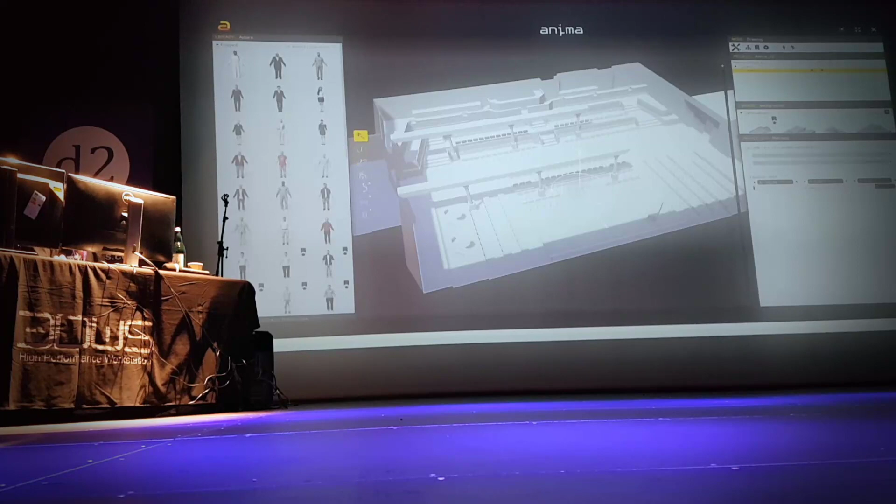Okay, so here we have these. So what you're seeing here is the actual model we will be using. This is a very low polygonal model, which is important since we want to work in real time, we have to take care about this, even because this model is used to calculate collisions, and we are going to do this.

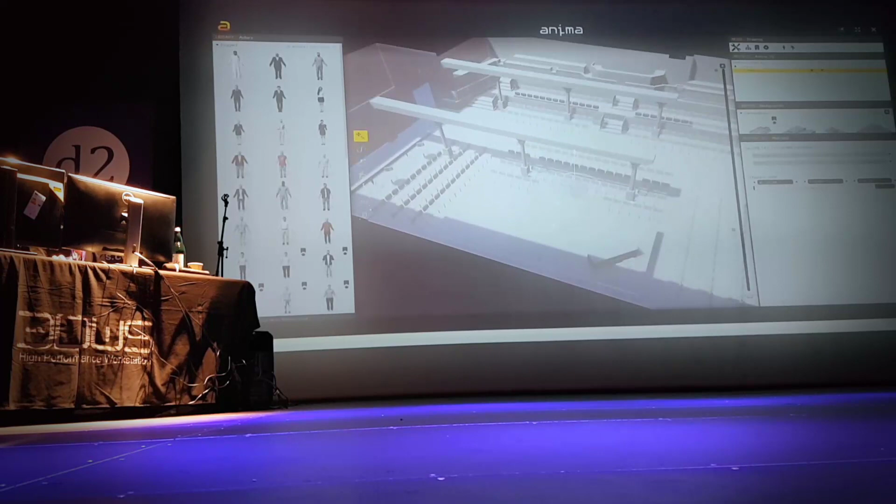What I'm going to do now is just create a section here so I can work a bit better. So here we have the entrance, and I will start by creating a path, simply drawing a line here, like this, and there we have it.

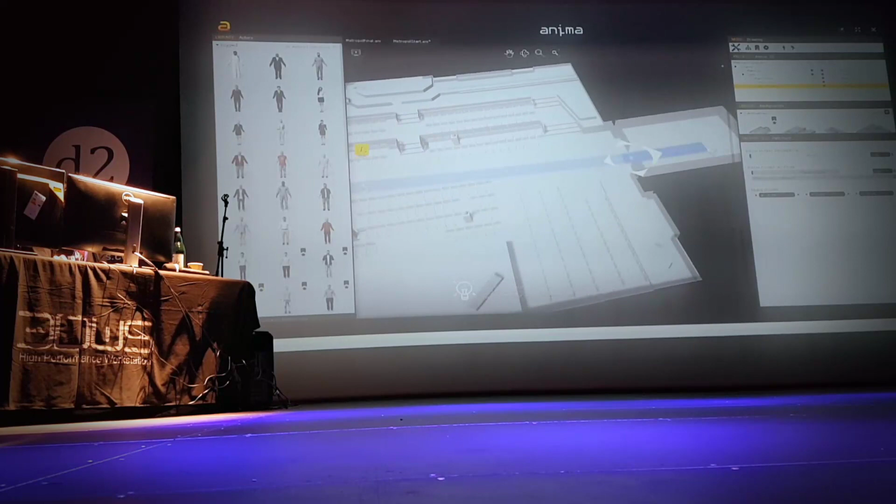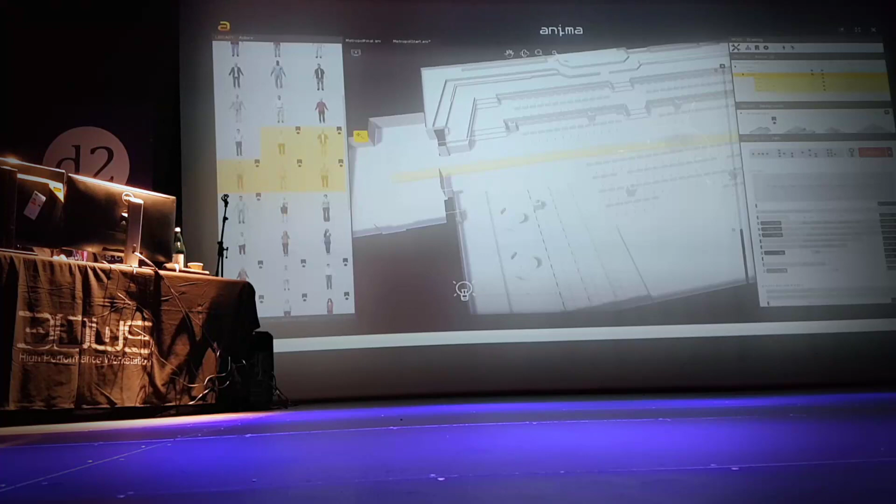So we can now start populating this path with characters. We have a list of characters we can use. We can leave the program to choose the characters by itself, but what I'm going to do is actually choose the characters I want to use, and just drag them here and click generate, and that's it.

Actually, I want them to move the other way, so we change the direction to forward. And now I can also easily change the number of characters I want to use, then click generate again, and that's it.

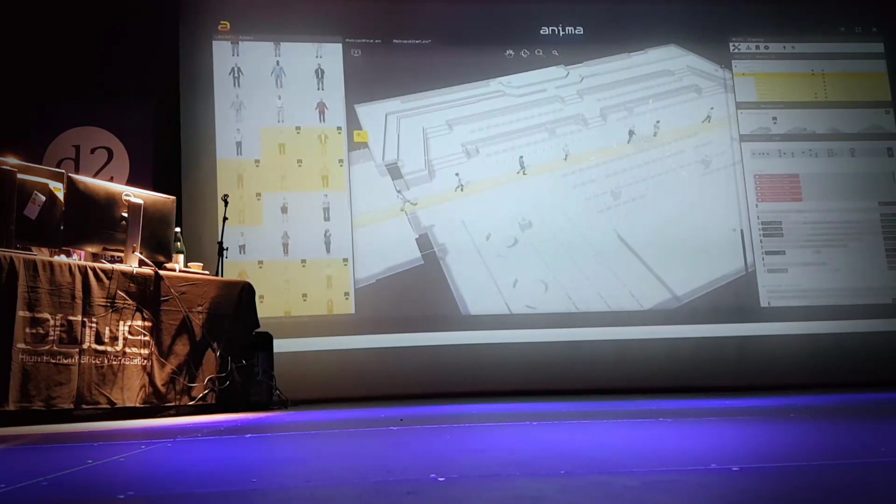Now it's very simple to use this. We can just select a vertex here on the path and move it. What I'm going to do now is make this path a little smaller, because I want a bit more space for another path I will be creating.

I want people going around the bar, for example, as they are now at this moment. So I will just create another path here, very easily. And as you can see, we can draw the path as we want, and then we'll be able to change the path shape very easily.

I will select this path, which is the first one I've been working with, and now I can choose to change individual segments of a path. So we can create a path with different width in this case. Okay, so here it is, it's okay.

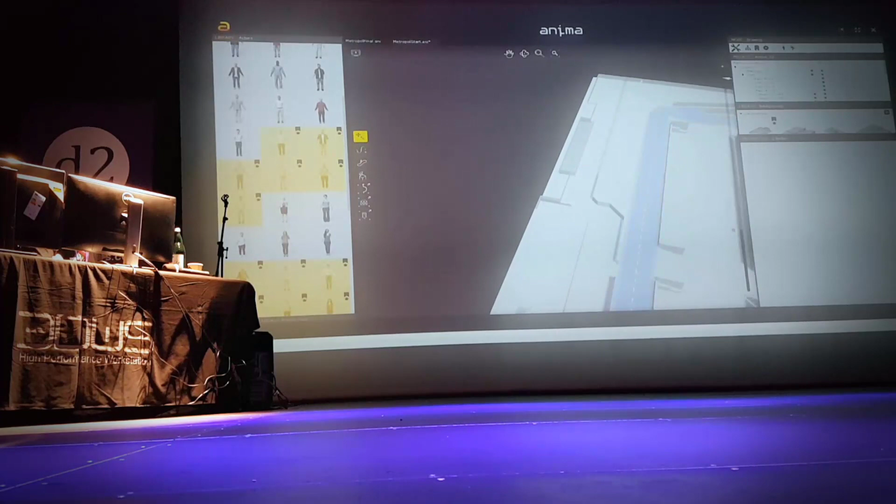I will select this path and apply the same characters I'm using here. This is very simple, I can copy the list and just paste it here, very straightforward and fast. So I will leave 5 characters here, I don't want too many, but I will change the move direction to backward, so we'll have other characters coming back to the entrance there. So click generate, and that's it.

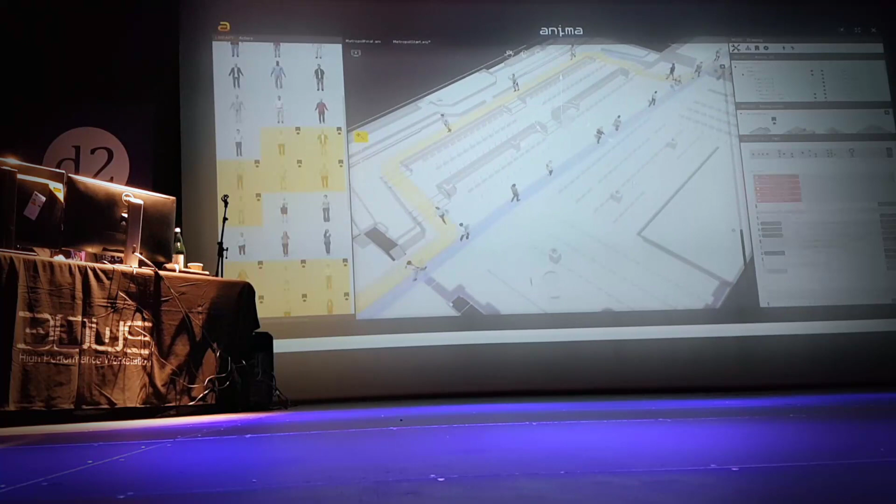And of course, this is in real time, not just because I'm moving it, but because I can just hit play and see, and I can keep moving the scene and see how it looks. So this is very simple to do.

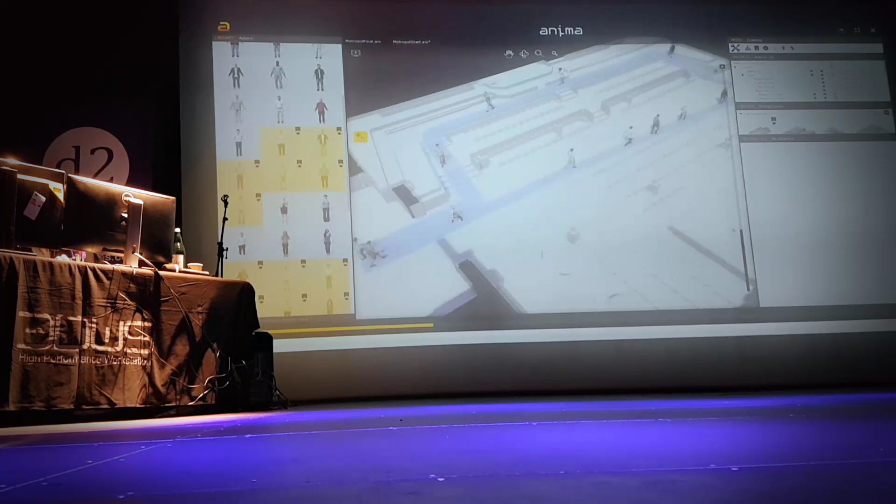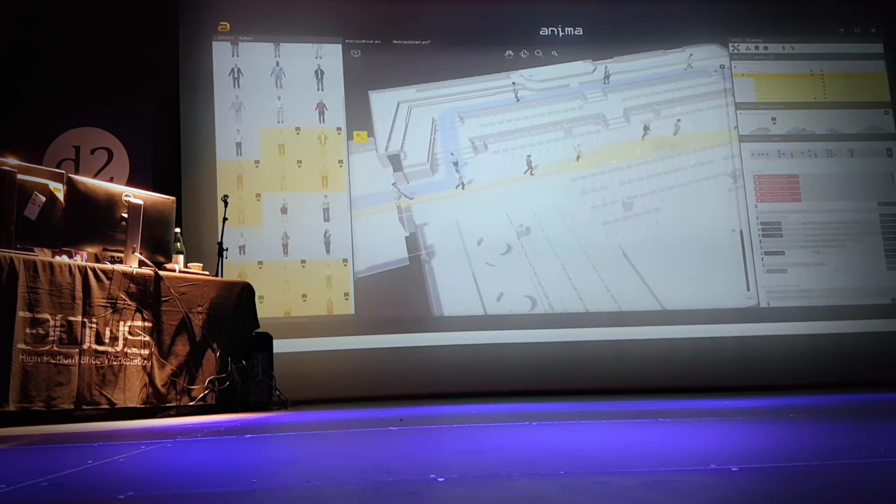We can also select, for example, a vertex. We can add more vertices and change the path, and change the width of this path here. So we can create very different situations.

Now, this is the first step. The second step is that we have a reservation for two. So here we have these tables. Let's just move here. Now there is a table tool, and this is also very simple.

We just click and drag, and we create the seats. We can then move the seats, adjust the position. We don't have to do this right at the beginning, we can do that at the end. So we select this table object. I will select just two, not one.

And click generate. Now, if I do this, I would use random characters, so I don't want this. I want to specify my characters, so we'll delete those, and I will select just a woman and a guy.

It seems we have a seat that's not right, but it's very simple to fix these errors. I just click and drag it to select the edge. Now I can generate, and that's it. And if I have some problem, for example with this seat being too close to the table, I fix it, hit spacebar, and you can see they are already animated.

Now, if we want to create the other table, very simple, just select it and copy it. And of course, I can change the actors. I can, for example, just drag and drop a different actor on top of those in the viewport, and it works. So it's very easy, very fast to do this.

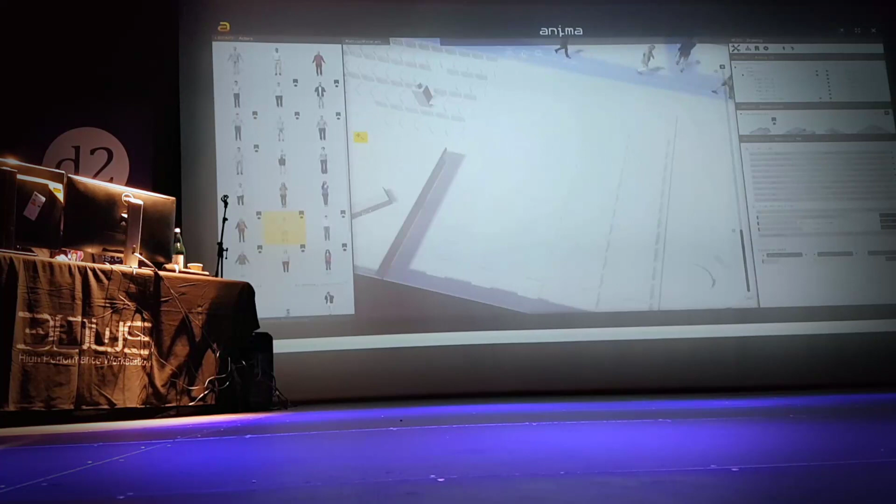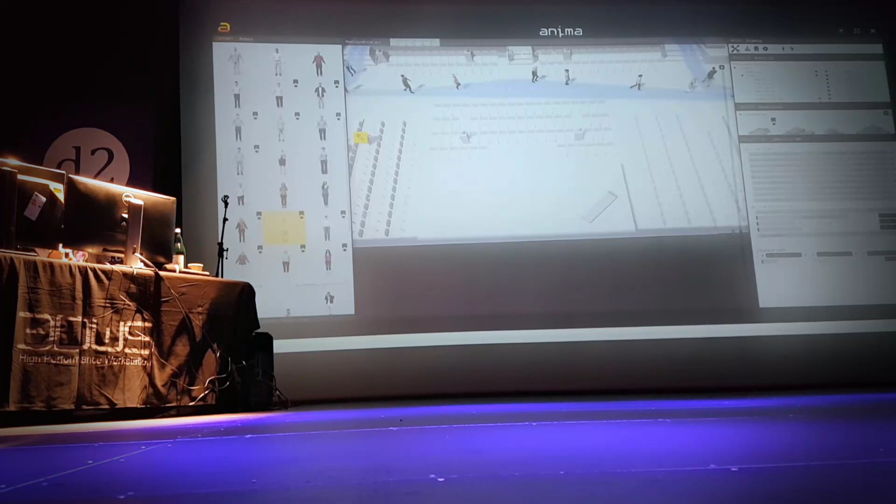Now, before going to the main part, which is the population of this front part I have here in front of the stage, it's a little funny to work with a virtual representation of the same place where I'm giving this talk. That was the idea. Let me introduce you to the area tool.

The area tool does exactly what it says. It creates an area, and we can create this area to make people socialize, simply have people here. We can change the shape of this area by selecting the area and activating the polygon tool, so we can shape this area as we want. As you can see, there is a grid.

That grid is used to generate and place the actors. So what I'm going to do is paste the same list of actors we used before. I will place here, let's see, 5 people. It could be fine. We can hit generate as much as we want until we find the combination we like. For example, this. The problem is they are not looking at the stage, which is probably what we want, at least what I want now.

So what I can create are focus points. I can create one focus point, and all characters will be looking at that point. We can create more, and use those to create groups of these characters in this area. So this is the area tool.

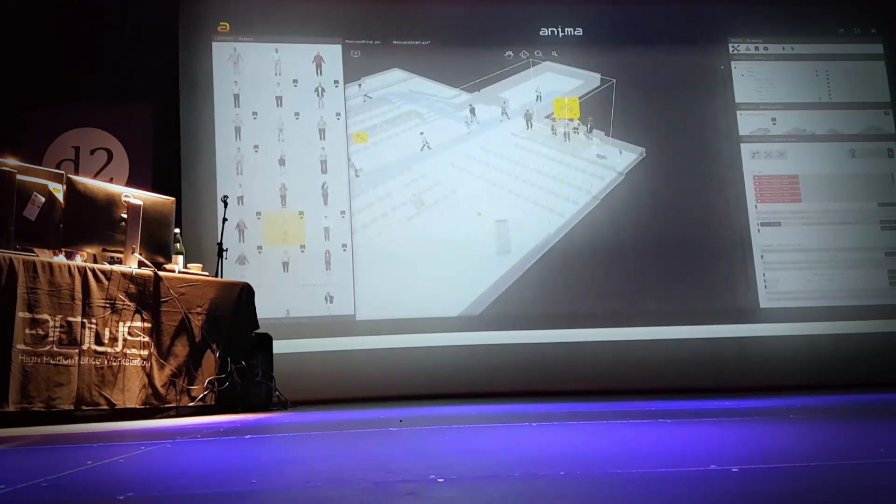Why have I told you about this? Because the third step we have is we need a bigger area to populate this part. Yes, that's it, because we are going to use this same tool to populate this part here.

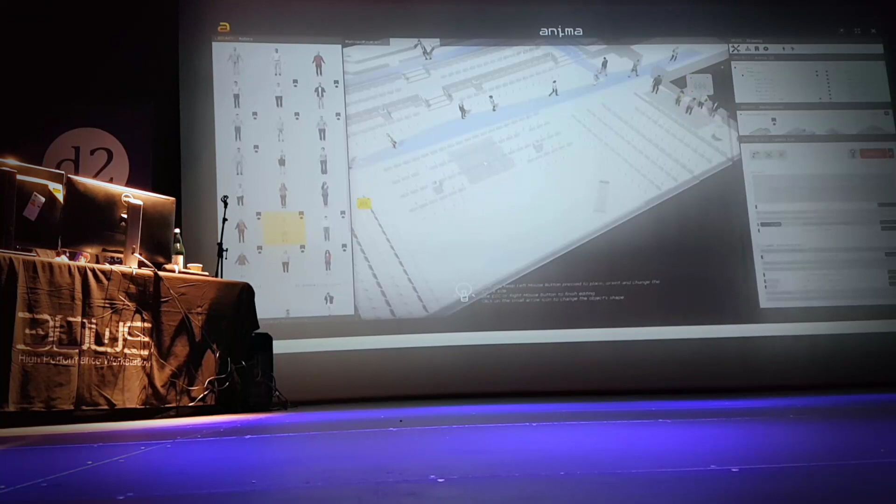So I will create a new area. We'll place it like this. But now what I'm going to do is change the shape, adjusting it to the place in the area here. Now, of course, this is the most part of the work, because as you saw, we can copy and paste elements once they are created.

So something like this should be fine, and something like this. Very simple. Now, if I try to generate characters, by the way, I'm going to use the same list. They will be placed randomly.

Well, actually according to the properties we have here. We won't dive into the properties, and in general in Anima we don't have tons of properties, but we have those we need to create almost everything we want.

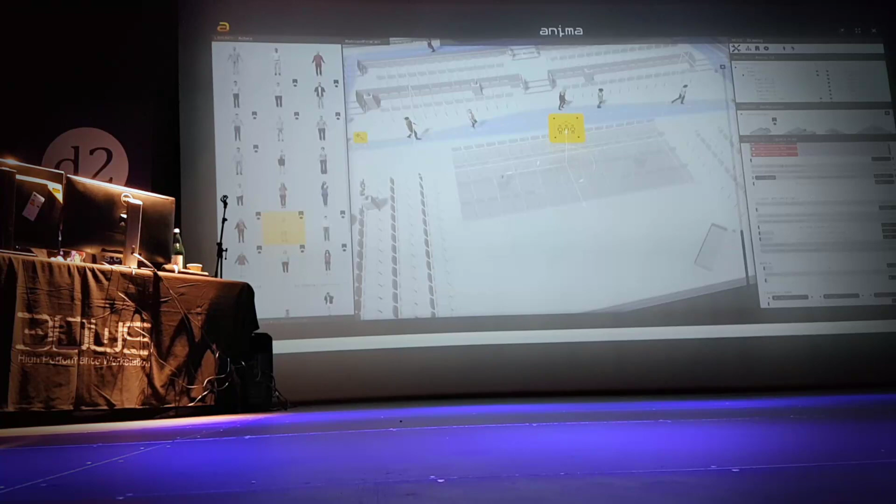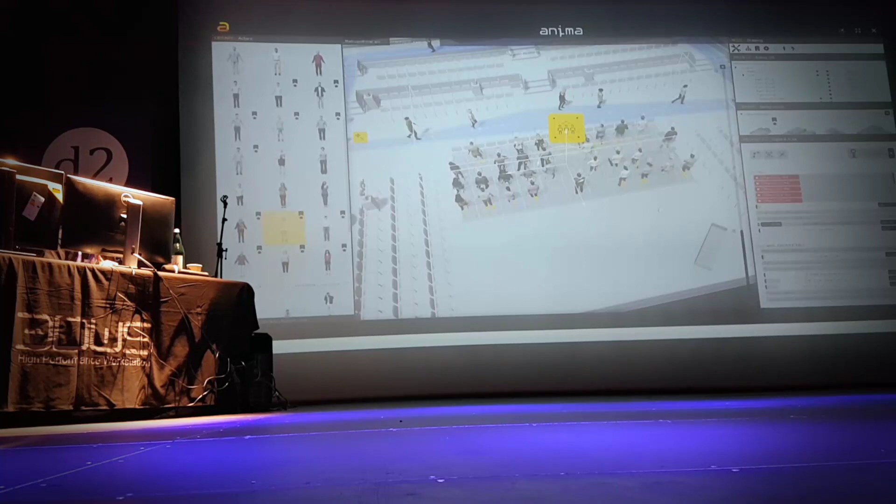Here I would set, for example, 30 people, and we could generate it. You will see that those characters are not doing what we need. First of all, they are not aligned with the chairs, they are not facing the stage, and they are not sitting. So let's start by sitting.

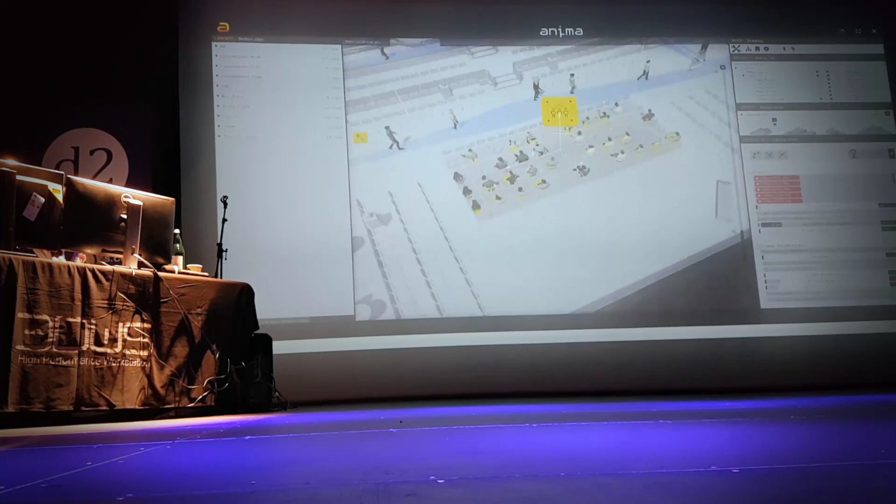First of all, what I will do is go to the motion clip library. I will select the entire chair category and assign it to this element. So they will be sitting, and as you can see, it detects the collisions automatically. Of course, they are not well placed, so this is very simple.

First of all, I will set the grid to set the rotation according to the grid rotation. I will change the grid rotation to this, and there we go.

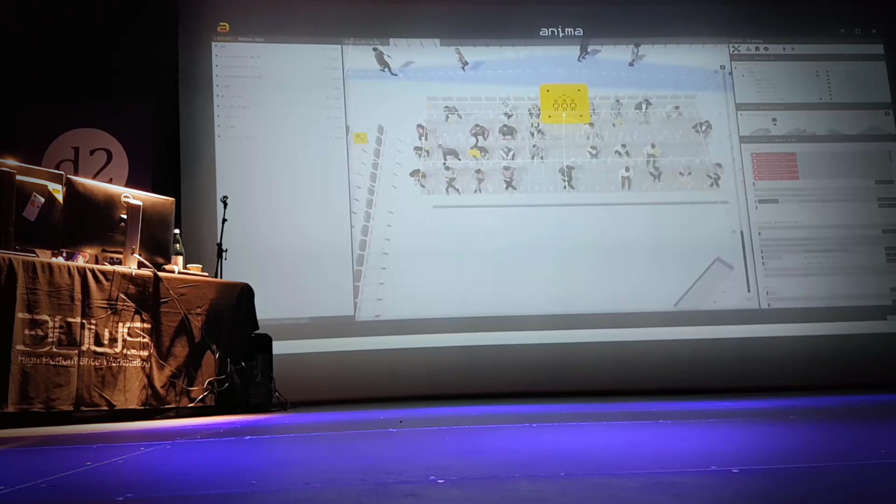Now the problem is that the seat size where the characters are placed is not correct, so I will change this size. Of course, I know which values I need to use. I need this. And the only thing we need to do is place them accordingly to the chairs.

Another thing, you can see they are sitting on this horizontal line. So just changing this, and that's it. Very, very simple.

Now, as you can see, there are characters sitting where they shouldn't. First of all, I have 75 slots available. I could fill all of them, but I will just fill 60, which by the way is not bad. And I will click generate.

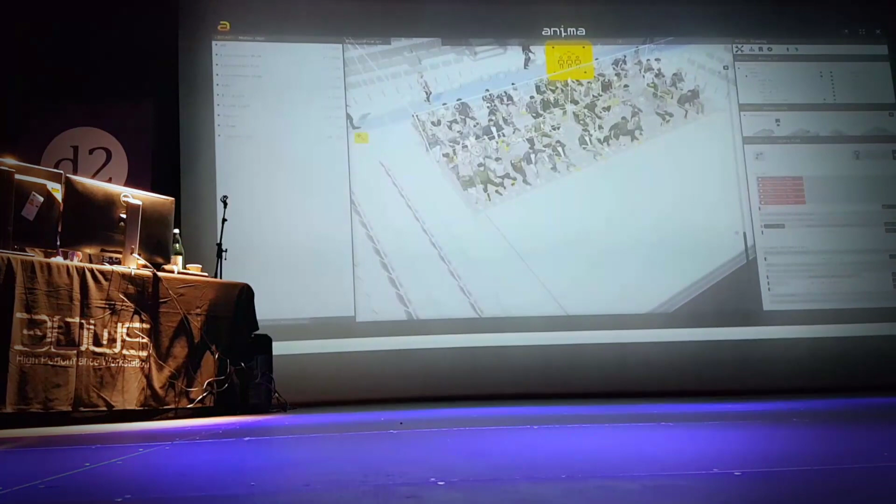So we have a lot more people now. And what I want to do is get rid of those characters that are not well placed. So very simply, select those characters and hit delete.

We also have the columns here. I suggest doing this once we have the distribution we like. So if this is okay, well, there's this character here, so this is actually it.

If you don't believe me, you can see this happen in real time. Everything is moving, being created. I don't have time to populate everything right now, so I will show you the final results.

But what I want to show you is how to import this into Unreal Engine and how fast and easy it is. First of all, I will save the scene to be sure.

One important thing is that once we have our simulation calculated, which we do because here we have the timeline filled with this gray bar, we can bake the animations. This animation will be baked into the frames, and we will be sure that when importing into a different package, in this case Unreal Engine, but it could be 3ds Max, Maya, or Cinema 4D, it works without problems.

So just save this project, we don't have to export anything. This is the great thing about the integration plugins we are going to use. So let's switch to Unreal Engine.

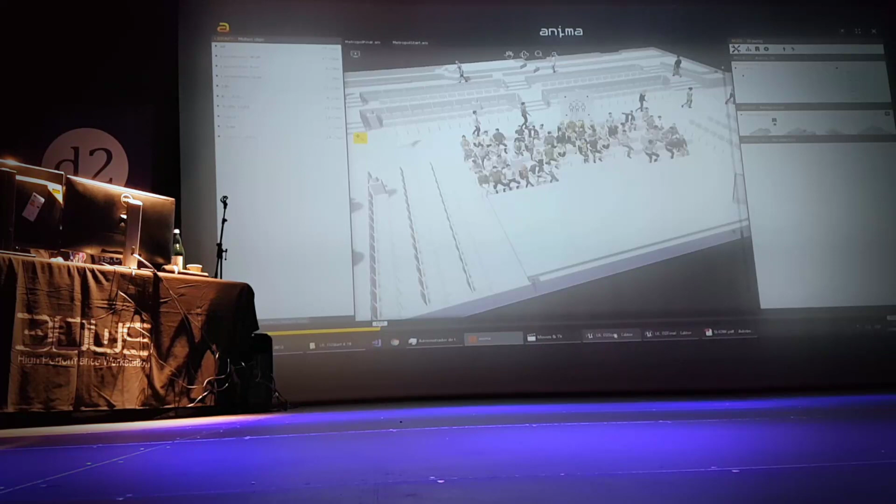I don't know how many of you know Unreal Engine. Some of you surely will work with it, and this is the actual place we are in. This is the actual model I've created.

Now I changed the chairs because I think these are just a little touch by me. I prefer them to be placed this way. So what we have to do is very, very simple.

Just select import, press the import button, and choose the project I was working with. It's very straightforward because once I've done this, it asks me which scene I want to import, of course the start one, as you can see the one we have created now, and I click open. Now there are a few options to set, and actually they are the same options you would find when importing in 3ds Max, Maya, or Cinema 4D.

Now, one important thing is that it will generate Unreal materials, which is very important because then we can work with that. And then we set where to search for assets, and we set what to do with duplicated assets.

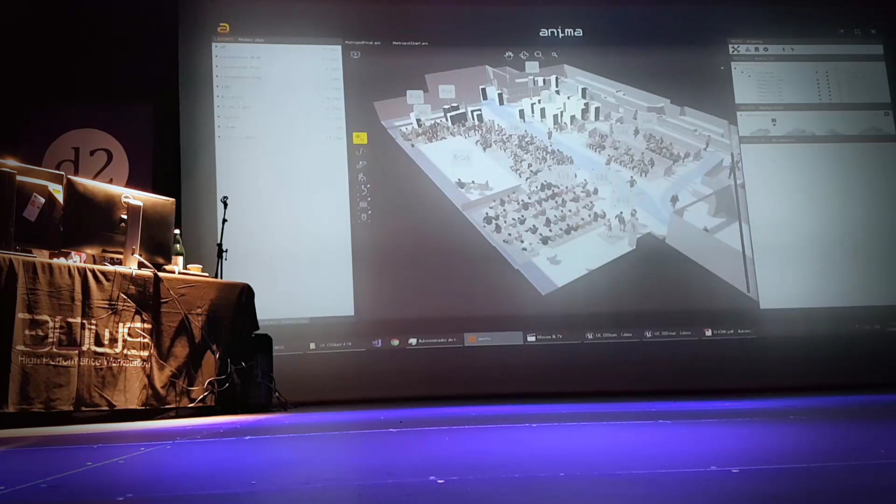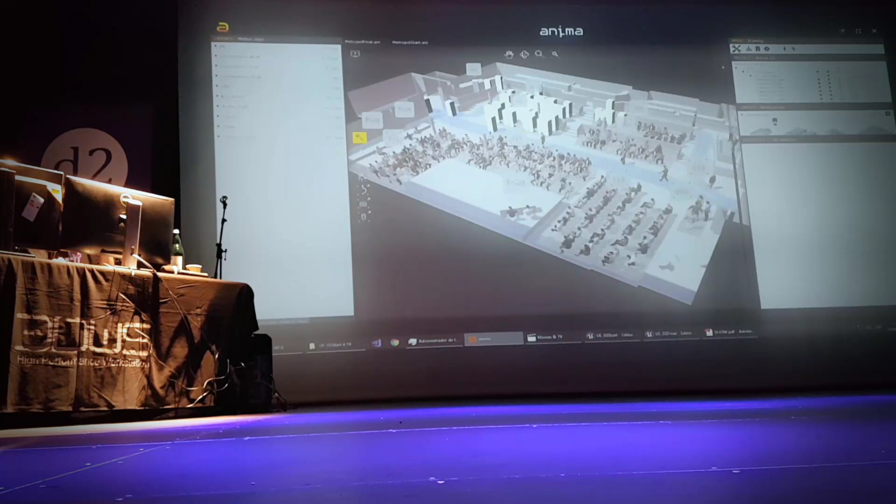Okay, so now we click import, and while this is importing it will take a minute. I will show you what I was telling you, to do this and get to this final result, which is this, as you can see. Don't worry about those boxes, this is just a way for Anima to optimize the performances. As you can see here is the full-blown theater, and so we would do exactly the same. We save this scene, we save the project, and we can import it in our Unreal Engine.

Now, to get here it's very simple, because we select this. We just have to unlock it. This is just important if we want to make changes, and then just copy this area, and the only thing we need to do is make it fit to the new place, reduce the number of characters, and you can do this several times. In this case it works like this, but we can copy paste very easily and very fast. Let's see if those characters are in Unreal Engine.

Well, we are almost there actually. As you can see, they are importing the models. And the great thing from my point of view is that we can have, as you can see here, full screen, exactly what we have. Now if I hit Alt-P, this is the actual scene animated, exactly as in Anima. It's very, very easy and fast to do this, okay?

So why is this important in general? Well, first of all, what we have here is some characters. I probably have these errors from Anima. Things from the live session, it can happen, and we could easily change this. For example, like this. Yes, you see this is too far forward, so I can move this, and now...

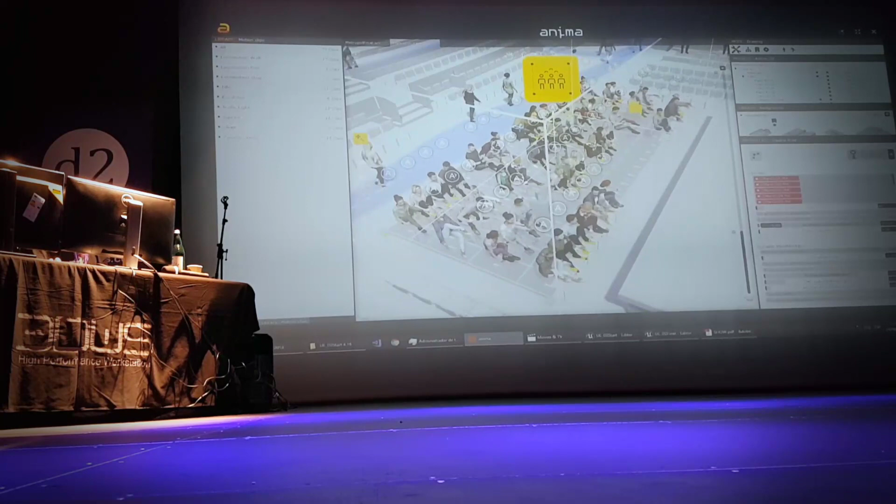Let's try to generate again just to be sure. I know why, okay, the problem is that it was not well positioned yet. As you can see, it's lightning fast to update. So we could save this, re-import in Unreal Engine, and boom, we already have it.

Now, why is it important to have this? This is the actual final version, okay, all the same theater you saw. I can hit play so you can see this moving and animating everything right inside Unreal Engine. And you don't have to do any export, you just set your project and import it in Unreal Engine.

And the good thing about this is that this is all Unreal assets. It means we have here all the animations, the skeletons, the materials, the meshes, the textures, so we can then go on and start using this fantastic engine and the tools we have there.

So for me, it's a very great way of working. And by the way, you are not fixed with only these characters. These are realistic characters, but from a video game standpoint, you could import a goblin, a troll, a zombie, no problem at all. You can import your custom animations, and you can use Anima to animate them and create the crowd animation you need, okay?

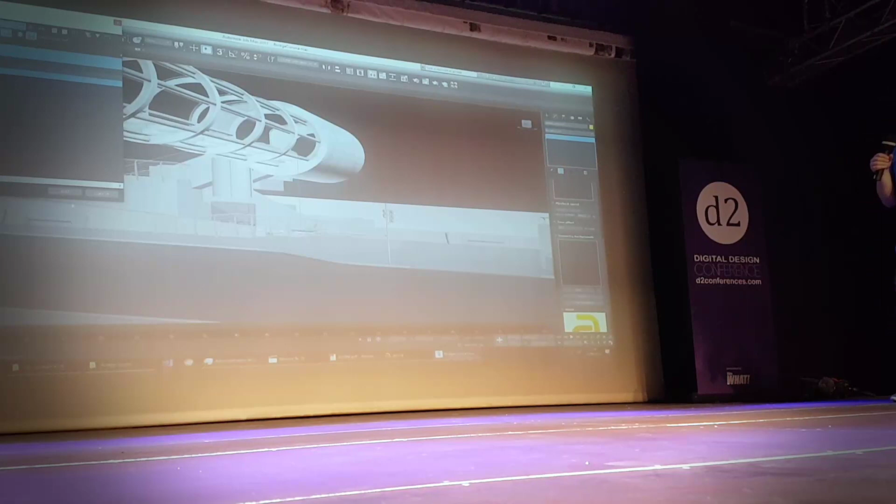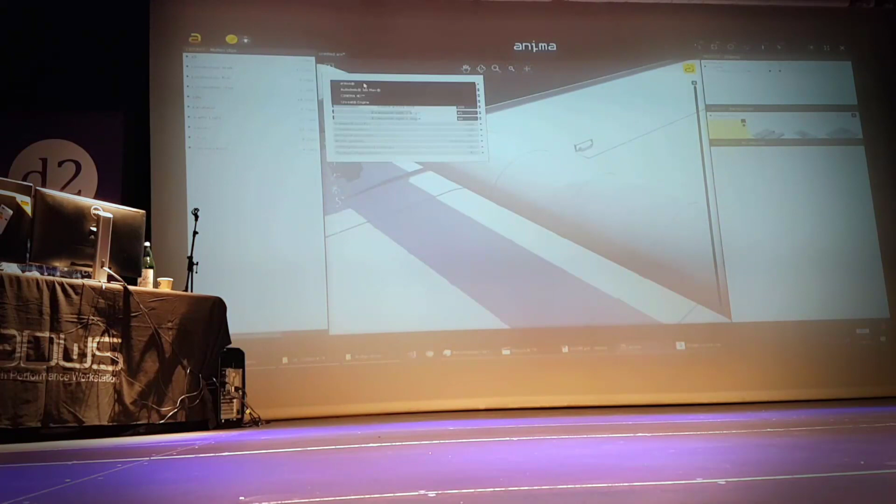Now he will add the geometry he wants to send to Anima. This one. And I just click send to Anima, and the geometry has been sent right now. Let's check, it should take a few seconds depending on the context. Here, this is importing now. It takes a little bit since it's calculating the collisions for the crowds. But here we can see the exact same geometry we just saw in 3ds Max, and he didn't even have to export it to a file or deal with any file formats in the middle.

So it's very convenient. I should also mention that the list of what he sent is stored in the Max file or the Cinema 4D file as well. So if he wants to update his geometry, all he has to do is pick the extra nodes he wants and it will update. We can also create something new, like a box door. Select our Anima scene again, click add to the list, and send to Anima again. This will re-import the background as well, and you should see the changes reflected instantly.

The other common request we have is that whenever you work in Anima and make a change, you need to go to the plugin and reload those changes manually. We figured there was a lot of time wasted just switching from one application to the other, so it didn't make sense to ask the user to do that manually when we already have a connection. So we implemented a feature where every time he saves the scene, as long as the connection is active, those changes will be reflected in 3ds Max.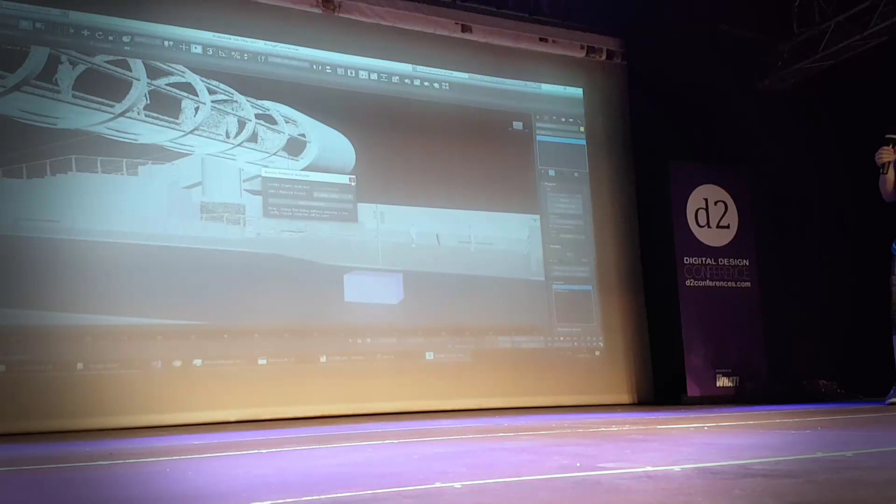I'll make something like this, really simple. Like this and this, okay, generate. And if I save the scene, it will be connected with 3ds Max. We should see the changes appear anytime soon. Here it is asking for the materials. And you can see the people there. If he moves the time bar, you should see the animation.

Well, let's show the next feature: cameras. This was a very common request, and we finally added it because now that we have a connection system, it's very easy for us to send this data to Anima. We've also worked on a nice interface to split these cameras in Anima, and we hope to build a lot of features based on cameras in the future.

Victor will resynchronize everything now. He can create a camera, and we should see that camera appear in Anima at any moment. Like this - you can see the icon there, and a list of the cameras with the same names. If I move it, it gets synchronized in real time. It's a very good feature.

The darkened part represents the aspect ratio of the camera, as it also imports the field of view and the aspect ratio of whatever you're currently previewing in 3ds Max. But this feature is not only for the viewport, but also works for camera animations as well.

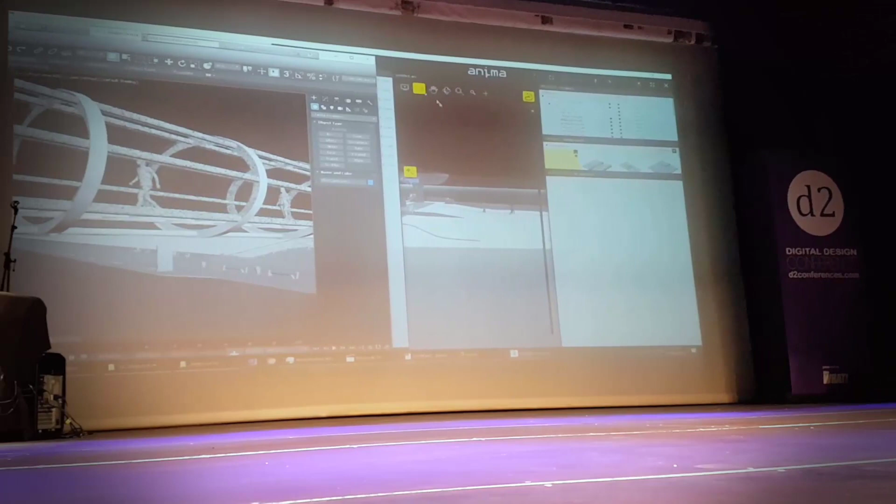You can see that Victor is creating a few keyframes, and you can preview exactly how it looks in the 3D application. Also, we can create any amount of cameras we want, so you can set your animation without any problem. I can create a new one there, and it gets on this list, so I can just go there.

This is just a cropping effect, okay? We also have synchronization of the active viewport, which is very cool for multi-monitor users. We have a small video to show.

Let's see. Everything goes. Usually 3D artists work with two monitors at the same time, so this is a really common feature. So you can make something like this, and you can see how it's synchronized on both screens.

Well, we hope you will enjoy these features. This will come out in the next release around September. I think the official release is September 21st... 24th. And now I'll leave you with Jose Benito, who has some very interesting research he wants to share that will likely be integrated into Anima 4.0.

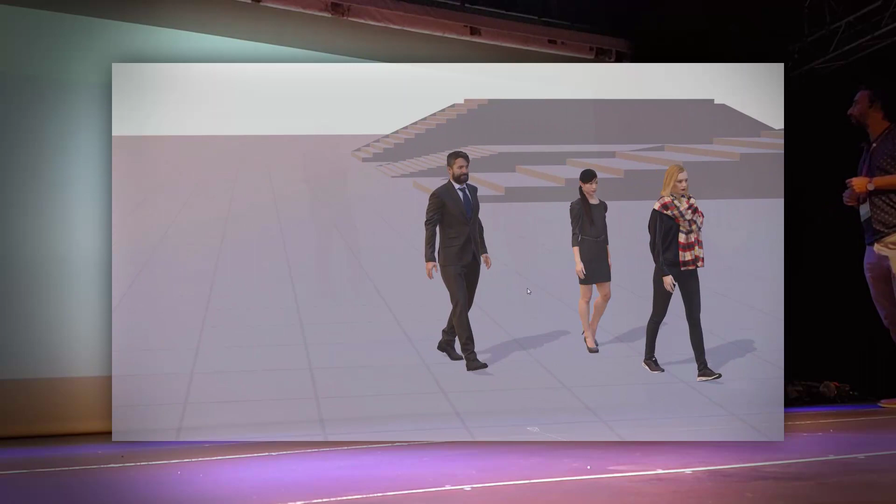They are following targets. I don't know if you can see that, but what we're trying to do is have a very smooth motion. Every time they turn, they move their arms and legs accordingly, and they can also overcome obstacles in a natural way. We still have some more work to do. We have to train our neural network appropriately with more moves so that it has more versatility towards obstacles. But you probably get the idea. And there's work to do with face and hair and cloth, but we think we're on the right track.

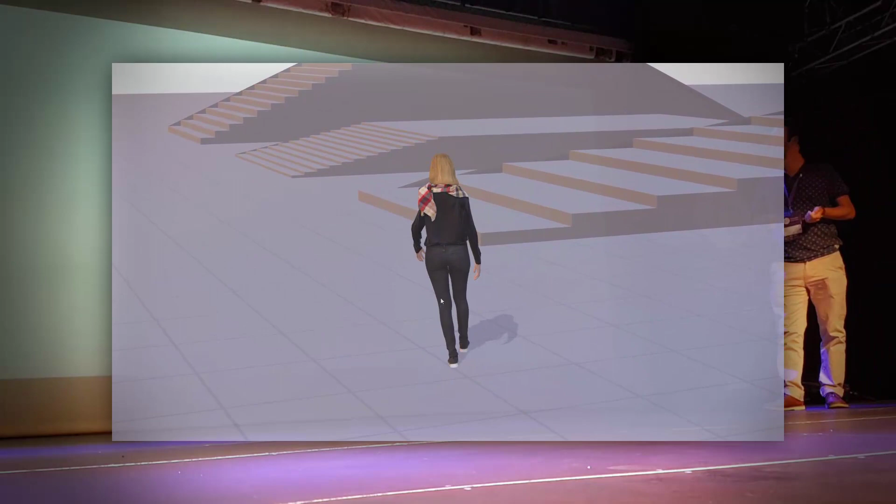Finally, I'd like to talk about future work and limitations. There are major development challenges, and one of them is this only works for navigation so far. So if you want to grab something or open a door or talk on the phone, you really can't use this, because this is just for walking around or going from A to B.

We would like to eventually incorporate these moves in a neural network, but it's still more of a research than anything. And we also have, like I said, a long way of tweaking things so that they are general, they work in your scene. But thank you so much for listening. This is our talk, and I hope you enjoy it.

Now I'd like to show you a video of the features really quickly.